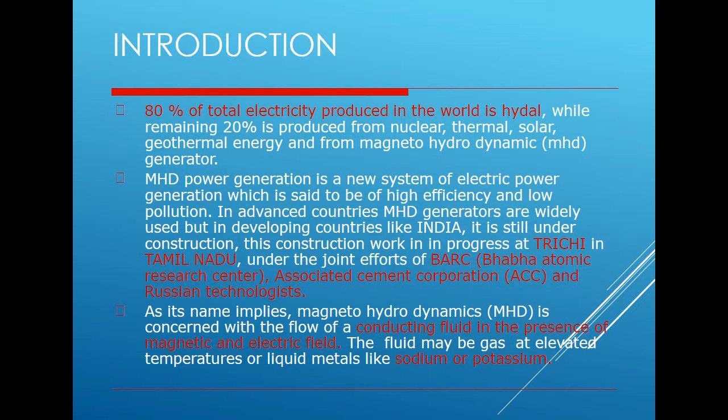An MHD generator is a device for converting heat energy of a fuel directly into electrical energy without a conventional electric generator. In this system, an MHD converter system is a heat engine in which heat taken up at higher temperature is partly converted into useful work and the remainder is rejected at a temperature. So in a usual heat engine, heat is taken at higher temperature, then the useful work is carried out, and whatever heat remains is rejected to atmosphere.

So like all heat engines, the thermal efficiency of an MHD converter is increased by supplying the heat at the highest practical temperature and rejecting it at a lowest practical temperature. The output of the MHD is supplied to conventional thermal plants.

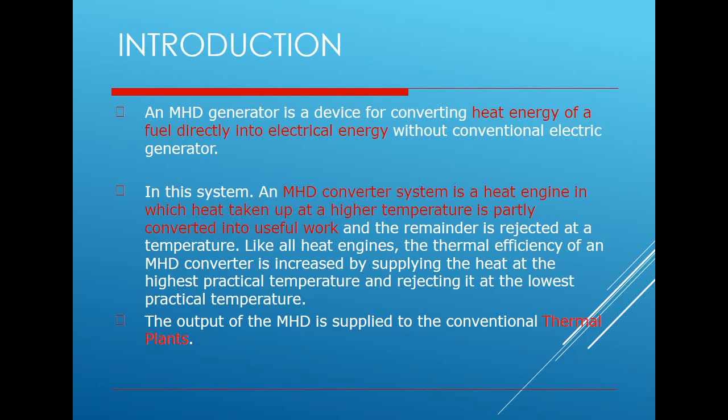Now let us see principles of MHD power generation. So in MHD generator, the solid conductors are replaced by a gaseous conductor, like ionized gas. If such a gas is passed at a high velocity through a powerful magnetic field, a current is generated and can be extracted by placing electrodes in suitable position in the stream.

So now here what happens? Here a gaseous conductor or ionized gas is passed at a high velocity through a powerful magnetic field. So due to that powerful magnetic field, and since it is an ionized gas, a large current is generated, and that generated current is collected by using electrodes. Hence, the principle can be explained as an electric conductor moving through a magnetic field experiences a retarding force as well as an induced electric field and current.

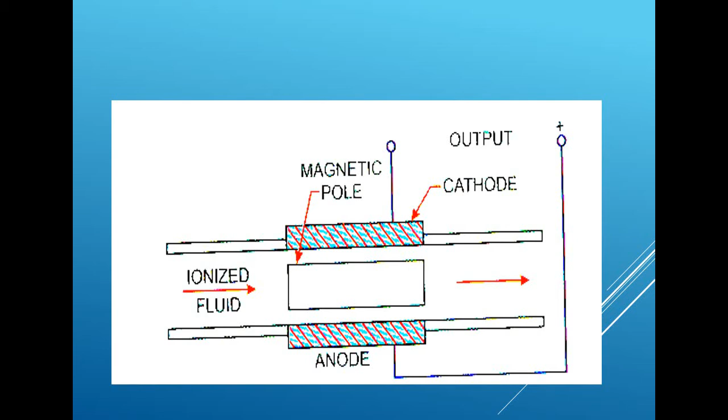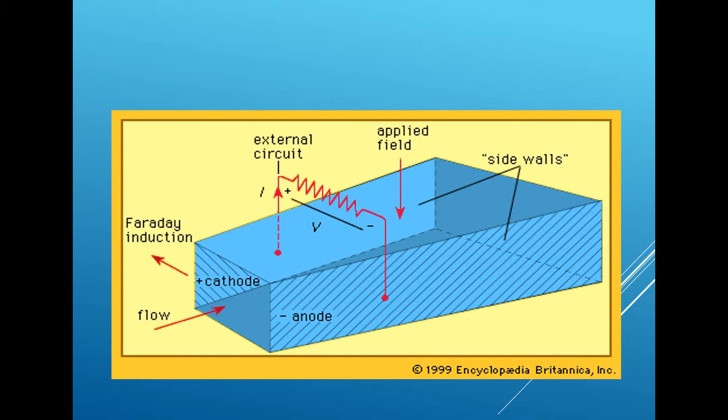So you can see in the another figure, flow from this direction. This is anode, this is cathode, this is the external circuit that is provided on the side walls. So this is the applied magnetic field, and then the current will start flowing.

The effect is a result of Faraday's law of electromagnetic induction. The induced EMF is given by E induced equals U multiplied by B, where U is velocity of the conductor and B is magnetic field intensity. Now the induced current is given by J induced equals σ multiplied by E induced. So now we have got the E induced, and σ is electric conductivity. So this is how the formula is derived.

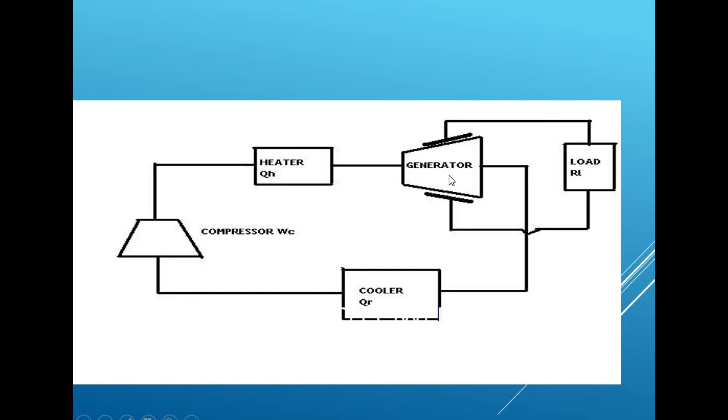So this is the overall construction of MHD generation. So you can see here a compressor, then heater. Compressor will provide pressurized air to this heater. Then through this heater there is a generator, and to this generator load is connected, and one output is given to the cooler, and again from cooler to this compressor.

Now the MHD systems are broadly classified into two types. One is open cycle system and another is closed cycle system. Closed cycle is divided into two subsystems like seeded inert gas system and second is liquid metal system.

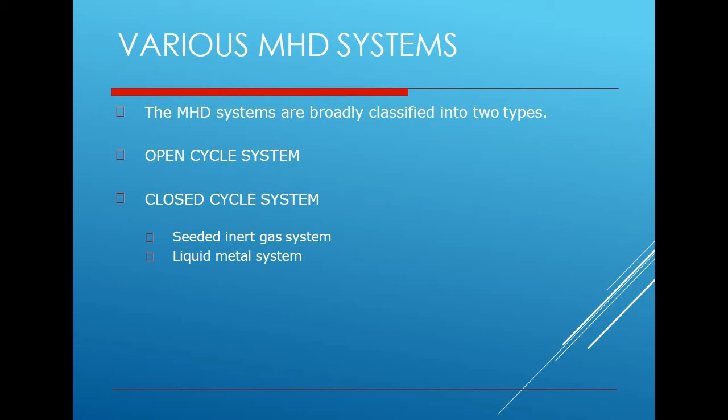Open cycle system, the fuel used may be oil through an oil tank or gasified coal through coal gasification plant. The fuel like coal or oil or natural gas is burned in the combustor or combustion chamber.

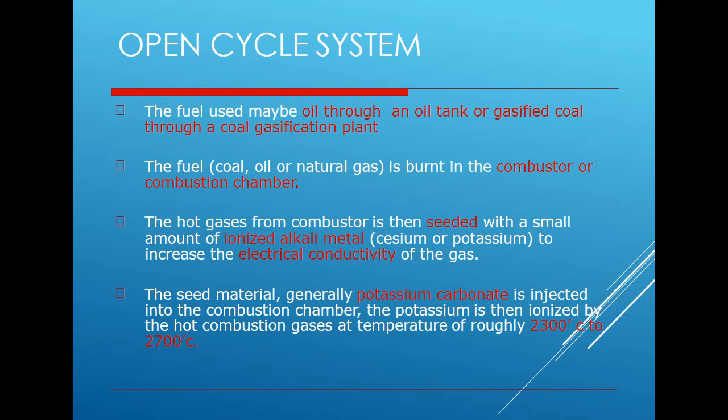The hot gases from the combustor is then seeded with a small amount of ionized alkali metal to increase the electrical conductivity of the gas. The seed material, generally potassium carbonate, is injected into a combustion chamber, and the potassium is then ionized by the hot combustion gases at temperature of roughly 2300 degrees centigrade to 2700 degrees centigrade. So here you can see the open cycle system.

So this is the open cycle system you can see here. Coal processor, combustor where coal will be burned. So compressed air will be supplied by a compressor here. After that, seeding input to MHD generator. So here you can see.

Then exhaust gases of MHD generator are passed to air preheater or regenerator, and then to seed recovery apparatus, then to purifiers, and to flue gas stack.

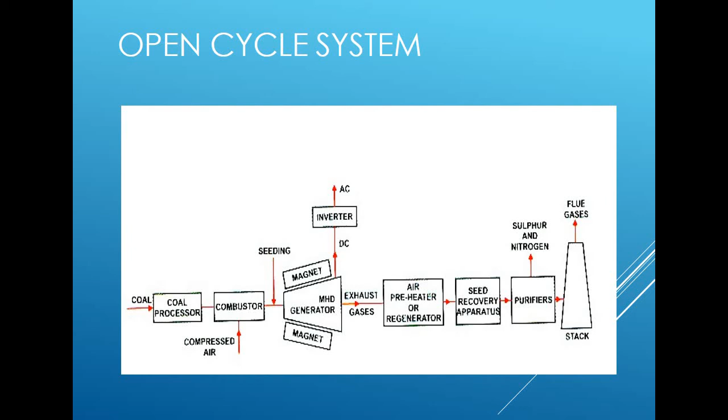Now let us see open cycle system. To attain such high temperatures, the compressed air is used to burn the coal in the combustor. It must be adequate to at least 1100 degrees centigrade. The lower preheat temperature would be adequate if air is enriched in oxygen, that is done by compressor.

An alternative is used to compress oxygen alone for combustion of fuel. Little or no preheating is then required. The additional cost of oxygen might be balanced by saving on the preheater.

Then the hot pressurized working fluid leaving the combustor flows through a convergent divergent nozzle. In passing through the nozzle, the random motion energy of the molecules in the hot gas is largely converted into directed mass of energy. Thus the gas emerges from the nozzle and enters the MHD generator unit at a high velocity. So this is how it works.

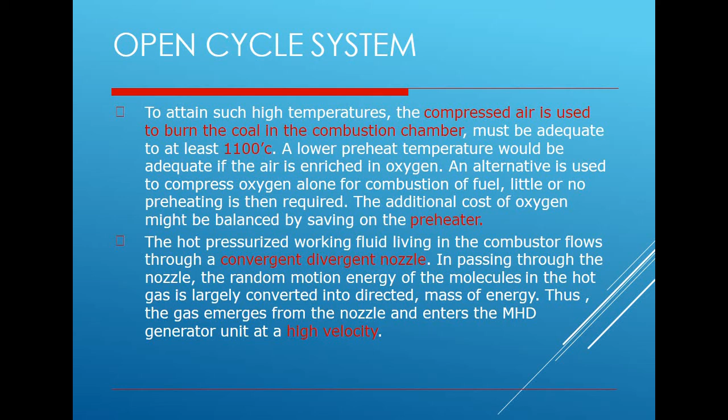Then the MHD generator is a divergent channel made of heat resistant alloy with external water cooling. The hot gas expands through the rocket like generator surrounded by a powerful magnet. So during motion of the gas, the positive and the negative ions move to the electrodes and constitute an electric current.

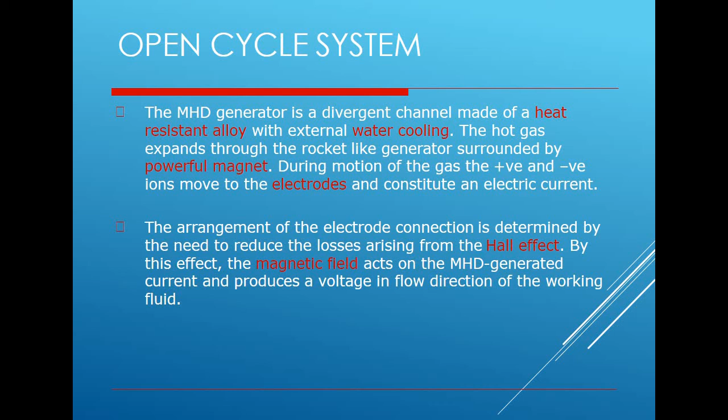An arrangement of electrode connection is determined by the need to reduce the loss arising from the Hall effect. So by this effect, the magnetic field acts on the MHD generator current and produces a voltage in flow direction of the working fluid. So this is just about information about the direction. So this was about open system.

Now let's see closed system. So two general types of closed system MHD generator are being investigated. Then electrical conductivity is maintained in the working fluid by ionization of seeded material as in the open cycle system. A liquid metal provides the conductivity. Then the carrier is usually a chemical inert gas. Although a liquid carrier is being used with a liquid metal conductor.

The working fluid is circulated in a closed loop and heated by the combustion gases using a heat exchanger. Hence the heat sources and the working fluid are independent. The working fluid is helium or argon with cesium seeding.

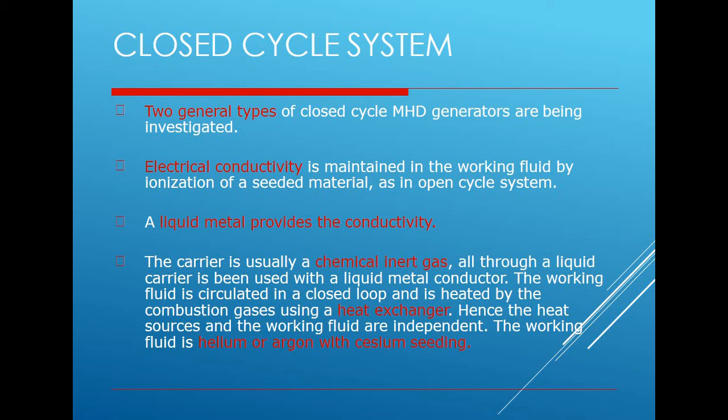Advantages: the conversion efficiency of an MHD system can be around 50%, that is much higher compared to the most efficient steam plants. Still higher efficiencies are expected in future, that is around 60 to 65% with the improvement in experience and technology. Then large amount of power is generated. Then it has no moving parts, so more reliable.

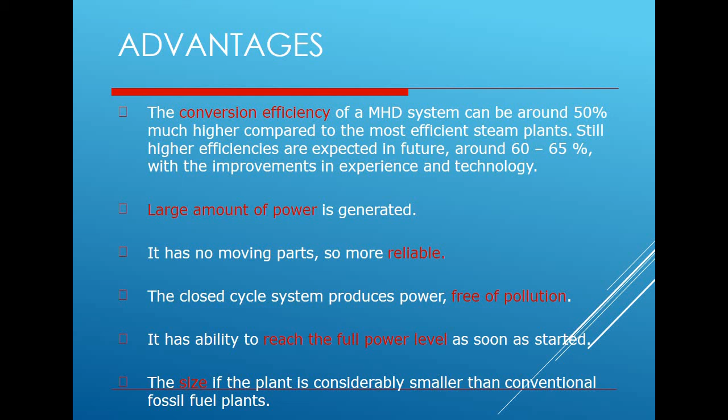The closed cycle system produces power free of pollution, so it has ability to reach the full power level as soon as started. And last, the size of the plant is considerably smaller than conventional fossil fuel plants. These are some more advantages.

Although the cost cannot be predicted very accurately, yet it has been reported that capital cost of MHD plant will be competitive to conventional steam plants. Then it has been estimated that the overall operational cost in a plant would be around 20% less than the conventional steam plants. So direct conversion of heat into electricity permits to eliminate the turbine or both the boiler and the turbine. Elimination reduces loss of energy.

Then these systems permit better fuel utilization. The reduced fuel consumption would offer additional economic and social benefits and would also lead to conservation of energy resources, then it is possible to use MHD for peak power generation and emergency service. It has been estimated that the MHD equipment for such duties is simpler, has capability of generating in large unit, and it has ability to make rapid start to full load.